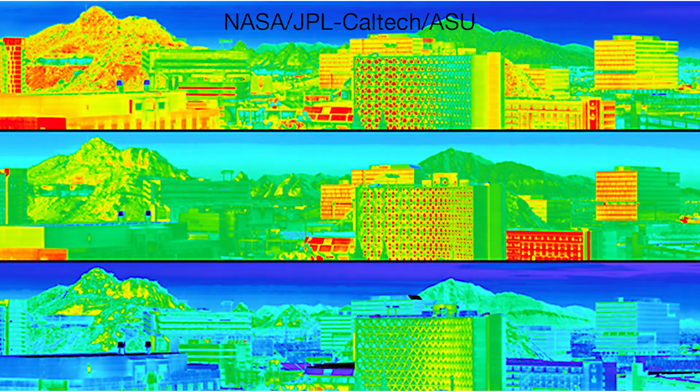MESH is an adaptive facade system that addresses a four-pillar challenge that is becoming increasingly apparent. The first pillar of this challenge is the so-called urban heat island phenomenon, where temperatures in urban areas are much higher than temperatures in the suburban and rural areas around them. This is happening due to the dense infrastructure that absorbs and re-emits heat.

The second is the high percentage that the buildings take in total energy consumption. In Europe, this percentage is 40%, while in the US, it reaches up to 50%. The third problem is the very high fraction of the buildings that have poor energy performance. For example, in South Europe, 49% of the buildings were built in the period between the 60s and 90s, and they lack insulation.

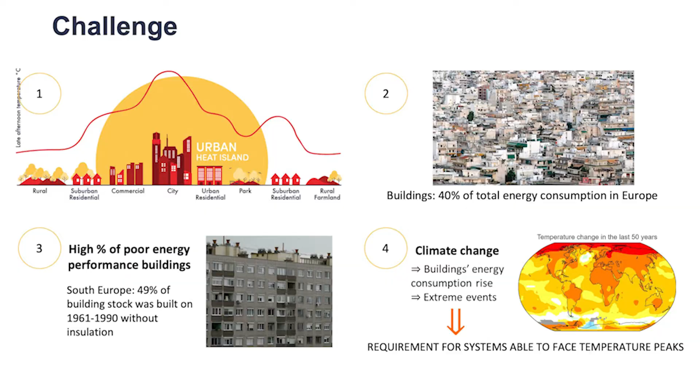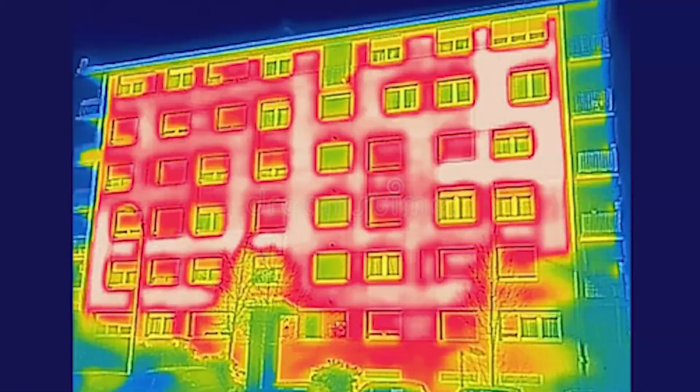The fourth pillar of this challenge is climate change. Temperatures are rising more and more every year, extreme events are increasing in intensity and frequency, and the energy demand of buildings is growing and will keep growing if the problem is not addressed. In these conditions, the improvement of the energy performance is one of the key objectives of intervention in existing buildings as well as in the design of new developments.

MESH can be a tool towards climate neutrality. It can be a strong piece of a comprehensive solution to this challenge that many cities around the world, but especially in Europe, are facing. The European Green Deal, the plan for transforming the European Union into a climate-neutral continent by 2050, highlights the need to boost renovation in order to reach the climate objectives.

The specific goal is to have more than 80% of the building stock transformed towards energy efficiency by 2030. Renovation solutions to meet this goal are becoming more and more important every year. Adaptive Architecture Systems was founded to take advantage of the urgent need for our building stock retrofit.

Now, what is our innovative product MESH? MESH is a new solution that will help push our cities towards climate neutrality through modulation of the building skin. It is a novel adaptive facade system that drastically improves the thermal performance of buildings while protecting them from environmental stress. Its design is driven by physical phenomena and AI tools to achieve maximization of the building energy efficiency.

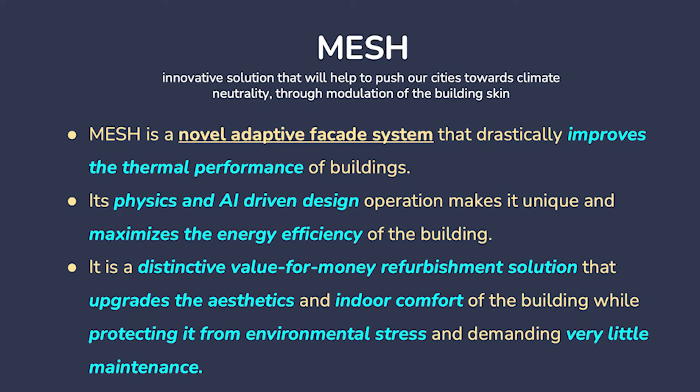It is a great value for money solution that has a small payback period. MESH also upgrades the aesthetics of the building and it demands very little maintenance. The design of MESH has been influenced by vernacular architecture and mostly by the integration of two wonderful solutions from the past, namely the dome roof and wind catchers, which is an indoor air cooling system in Iran.

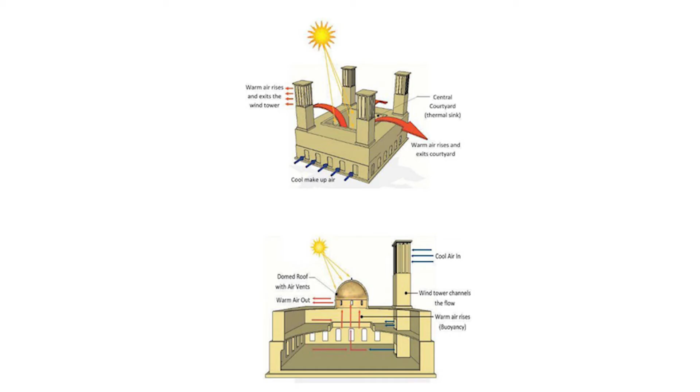We were inspired to design an innovative system that is driven by the natural stack effect, where air motion is driven by air temperature difference and air pressure difference. We used 3D parametric design tools and CFD modeling to visualize and communicate our vision, but most importantly to test its performance in different conditions.

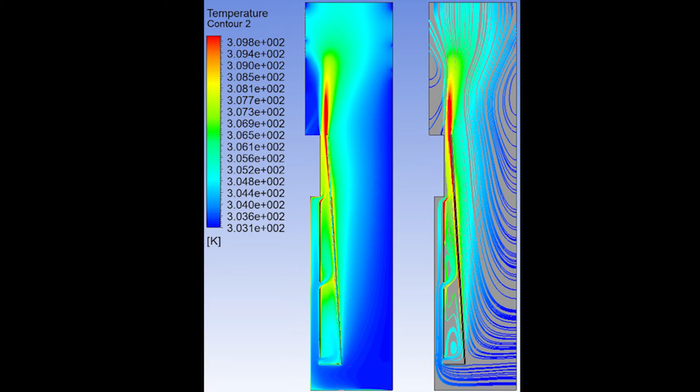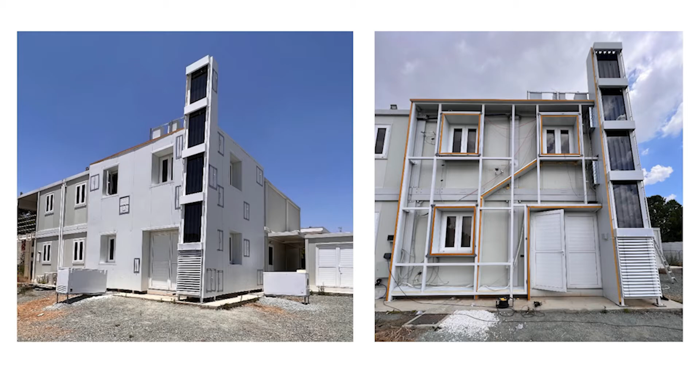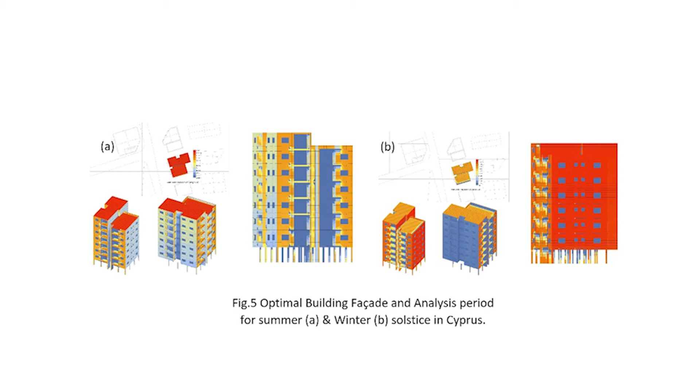The MESH is automated and driven by a central AI-based system. This system collects data from a network of sensors that is installed inside the facade, as shown in the picture. This system in time learns and adjusts according to the data input. The MESH system is a friendly solution for existing buildings that will improve their energy performance. It focuses on increasing the energy efficiency of the buildings while improving the aesthetics and function of their facade.

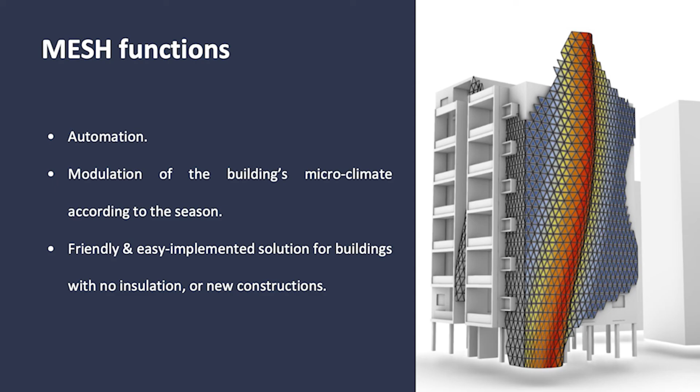MESH addresses the needs of the building renovation market for residential and tertiary building blocks that were built before 1990, putting it in a competitive position in the building renovation market with a very low cost compared to highly customized adaptive facade systems used in landmark architecture. The aesthetic upgrade that MESH will offer to existing buildings can be envisioned through the renderings illustrated here.

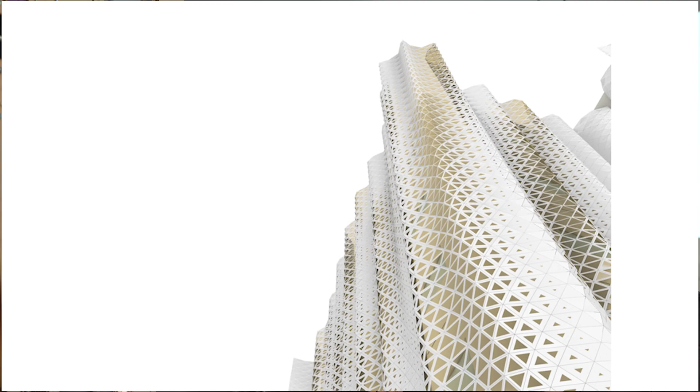MESH is a solution that contributes to the achievement of sustainable development goals. These goals are the heart of the 2030 Agenda of the United Nations for Sustainable Development. By implementing MESH as a solution, we are smartening up the building stock while making it green, fun, and interactive. In parallel, we are transforming the living spaces, making them enjoyable, sustainable, and resilient.